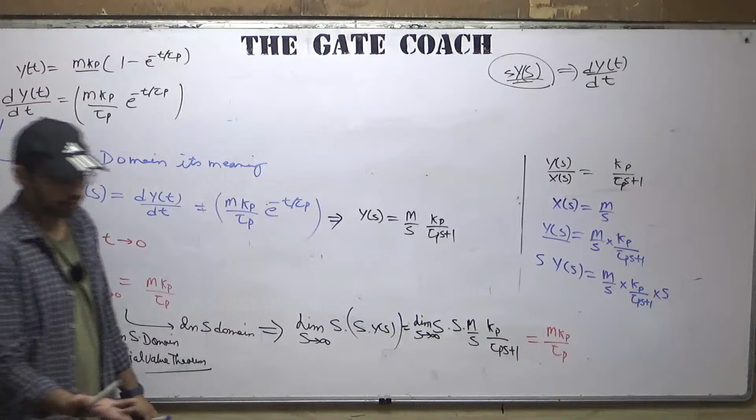Online students, any doubt till now?

Okay, you missed the first part. Which first part, just tell me. In the S domain, s tends to infinity — if we take this as s domain, s tends to infinity. Yes, that's right. This means that we are calculating the initial slope of a curve. The actual meaning of this thing is that we are calculating the initial slope.

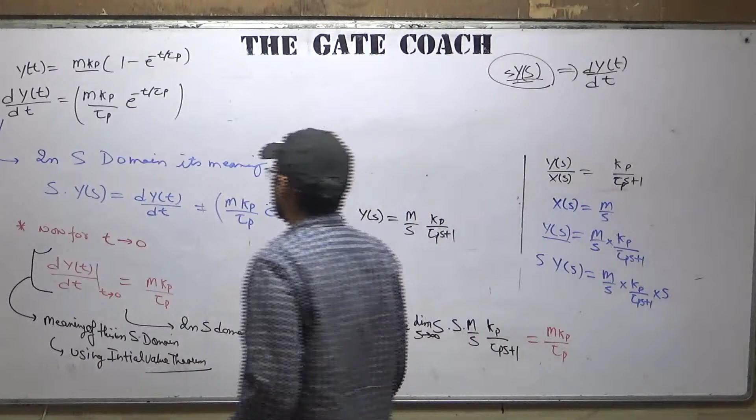Okay, basically I tried to explain the meaning of the previous lecture that we discussed: if I travel with the initial speed, it will take T equals tau p time to reach the ultimate value of response. And we have solved this with the help of different equations in the T domain. So how can we calculate the same results using the S domain?

So this is the way to calculate the value of T equals tau p using the S domain. We had solved it in the T domain, now we have solved it in the S domain. That's the thing you should know.

Okay, how are you able to solve these things when you are given only ys? If an equation is given in the S domain, you can also easily solve this if you know the tricks and proper use of the final value theorem and initial value theorem.

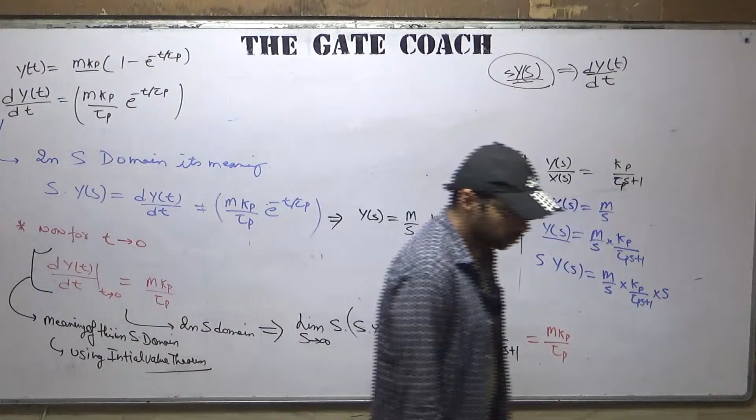Online students, got the point? Okay.

So please remember these things, they can ask you in the form of multiple choice or MSQ questions. They will give you a statement and can form it in any way. I will give you a test, and that test will contain these things. Don't worry, I won't give an easy test, I'll give a difficult one.

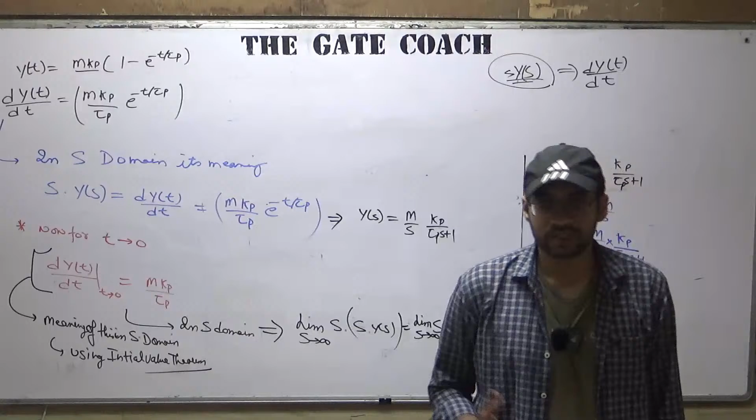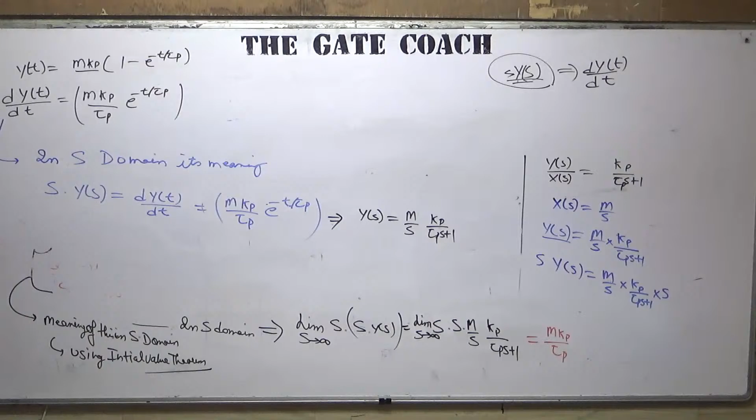Done with this thing? Okay, now we are going to discuss — we have discussed what first order systems are. You'll ask, sir, how can we feel what a first order system is? So today we are going to discuss the interpretation of first order systems in the real world, how a first order system looks in the real world, and how to make the equations using mass balance and energy balance — how you can model the first order system happening in the real world.

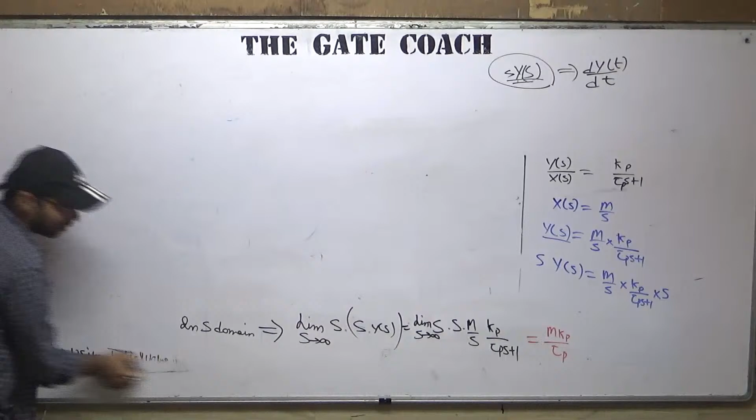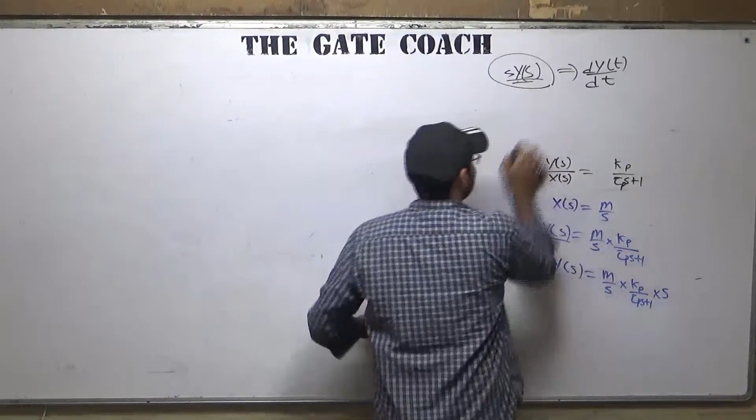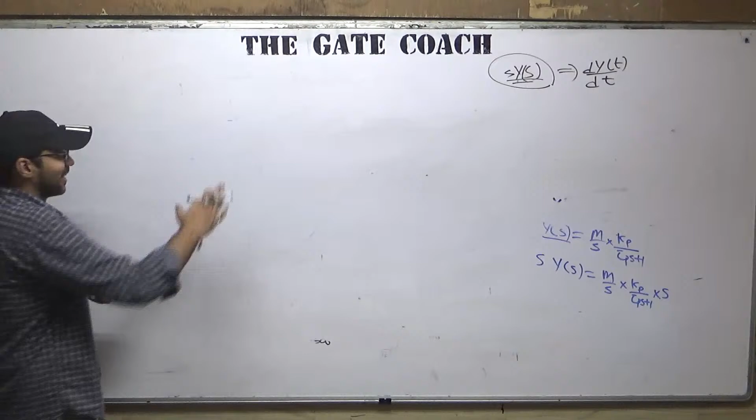अंसारी साहब कितना आता है आपको मास बैलेंस और एनर्जी बैलेंस, और नेताजी आपको भी देखते हैं कितना आता है. देखो नेताजी तो सो रहे हैं. सो गए क्या? फिर कहाँ खो गए? किस चिंता में हो हमें बताओ. किसी ने कुछ बोल दिया, किसी का मैसेज आ गया? आते ही नहीं सर, आने चाहिए इसका मतलब. अंदर ही अंदर तो लड्डू फूट रहे. हाँ सर आने चाहिए, क्यों नहीं आए? तो मेरे दोस्त कह सकते हैं तो, है ना. वो खुश हो रहे, मैं भी खुश रहना चाहता हूँ.

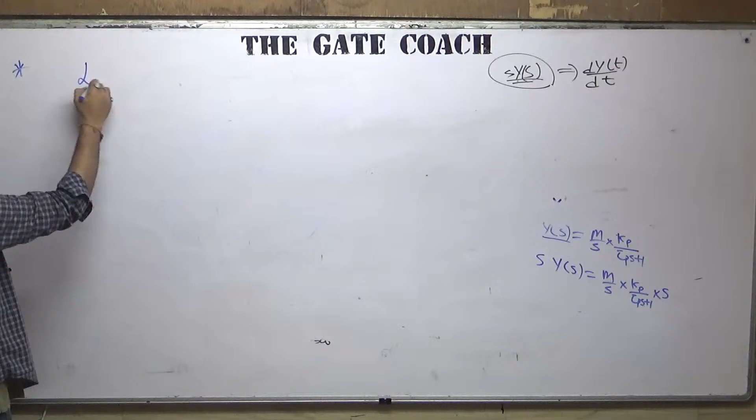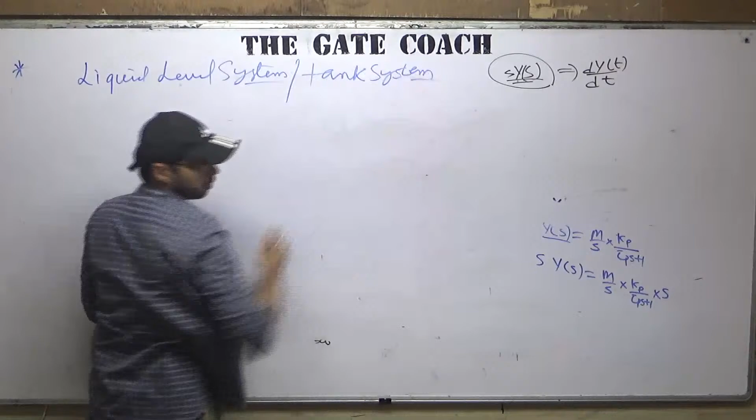Let's see what happens and how we can model this system as the first order system.

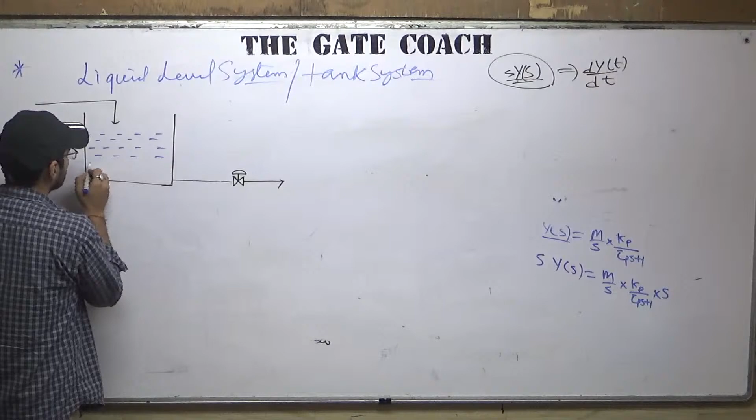This is your flow rate, Q in and Q out, right? Now, let's take this height as H.

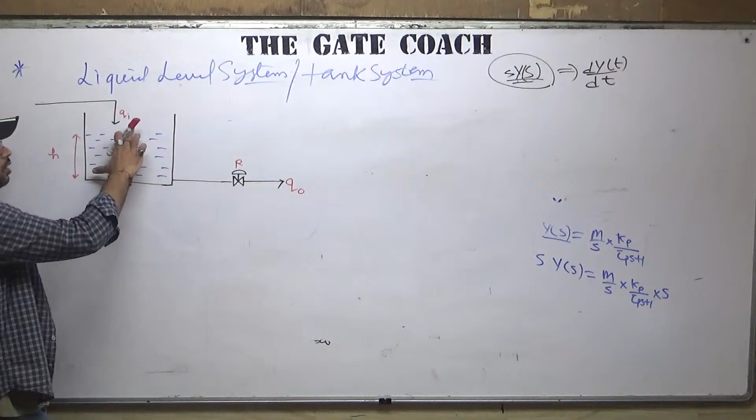So what is happening at initial steady state? Q is coming in. When water comes in, the height will increase, right? And after height increases, hydrostatic pressure will exert. Due to this, flow rate is also there, outward flow rate is there. It is Q naught. The valve is also there, and this valve applies some resistance to the flow, right?

Now after some time, this QI changes to QI dash, some disturbance occurs. So let's take this QI as first 5 meter cube per second.

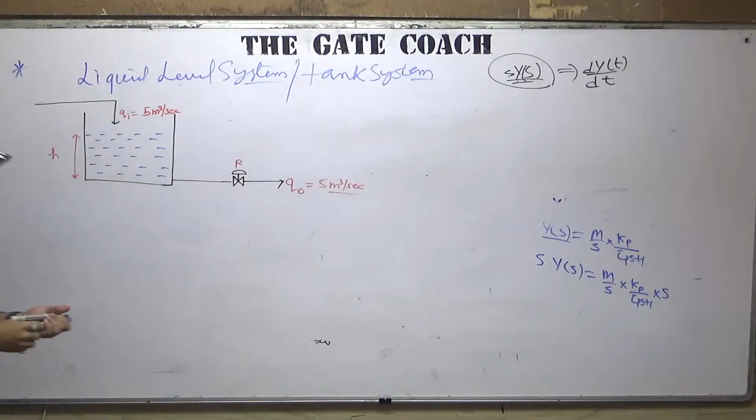So at steady state, when this is 5 meter cube per second, this will be what? This is clear, okay, 5 meter cube per second. Now, due to some disturbance in the backward, this flow rate changes from 5 to 10 meter cube per second.

So when it changes from 5 to 10, what will happen? The height will increase from HS to H, some height we don't know, random height, because height is a variable.

Now when height increases, what will happen? Hydrostatic pressure will increase. So what happens when hydrostatic pressure increases? Yes, Q naught also increases, we don't know exactly how much, but yes, Q naught will also increase. So it will change to Q naught dash.

We want some relation that relates the change in the output with respect to the change in the input. So for that, in this system, what do we have? Mass is there, flow rate is there, so we will apply mass balance.

We'll apply mass balance. So what will happen? Mass flow rate in minus mass flow rate out is equals to accumulation, right? In minus out equals accumulation. This is mass balance, simple to simple.

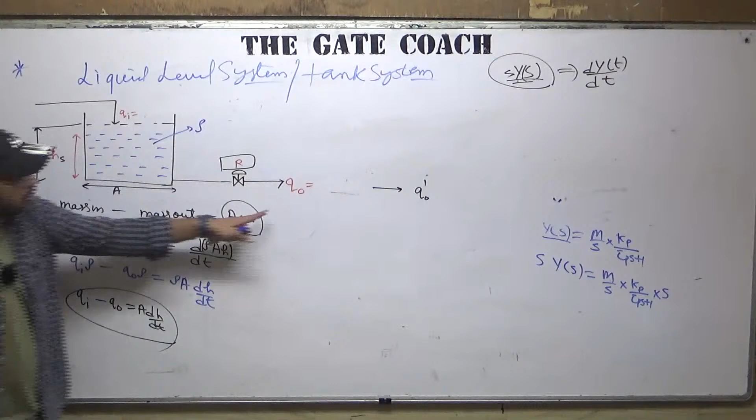Because R is also affecting Q naught. This is a valve, I can increase and decrease the resistance. R variable is also there, and we need to include R in our system because it is also affecting Q naught. But how it is affecting, we don't know. So we want a relation that relates Q naught and R, because Q naught is directly affected by R in some relating way.

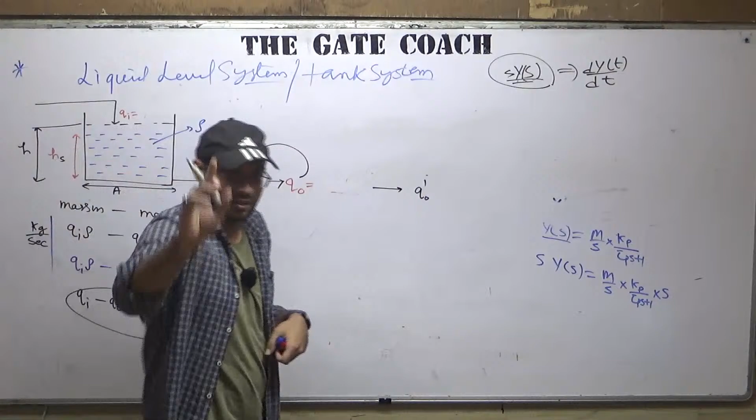So we want a relation between Q naught and R. But we know in fluid mechanics a small relation already. What is that relation? We will see.

The relation is that this tank system is there. If you put a hole here, and h height is there, what is the velocity?

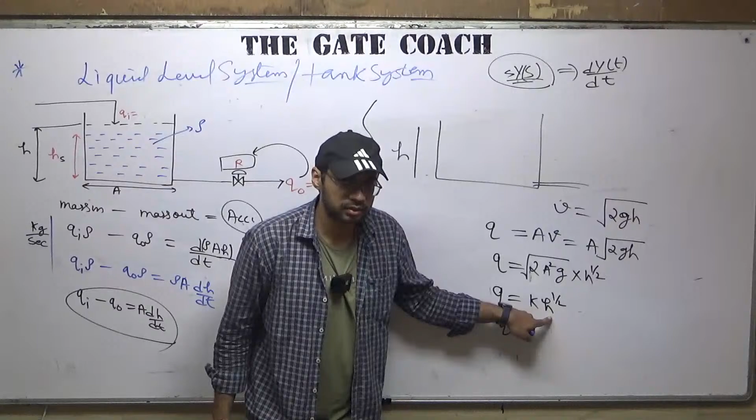Q, because see, this is the major thing, this is the height. Height is a driving force for the flow rate. What is another thing that affects the flow rate? Resistance. Resistance is another thing. This is the constant.

And R is what? 1 by K. And R is your resistance.

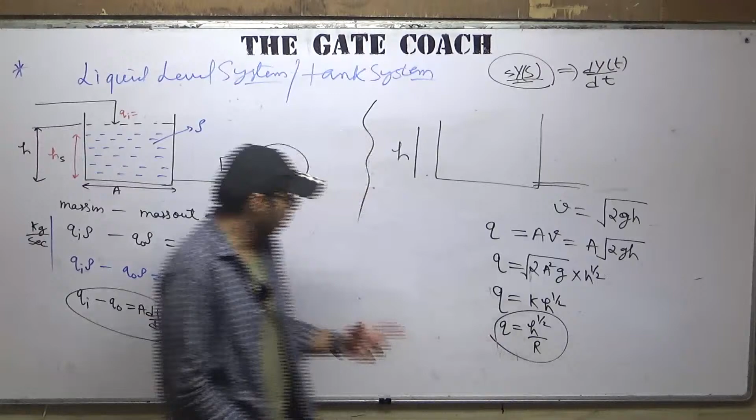Mera mann kar gaya. See, I am building up an equation, a relation for Q naught and R, because this Q naught is affected by the R resistance. How it will be affecting, we're going to discuss, right?

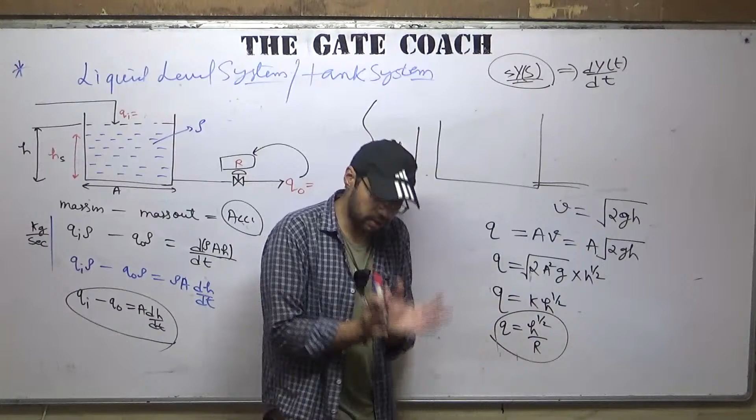Now what is happening here? This is a constant, but this is not actually a constant, it's a resistance. For this flow rate, this is the height. If the system is ideal, nothing is there, resistance is not there, this will not be there, but resistance is there, meaning this flow rate is not the actual flow rate, or you can say this flow rate is not the ideal flow rate. Some resistance is there in the valve, and the resistance is given by this thing.

But there's a catch, and what's the catch? This is not for the standard thing, this is for a special case. For this one, we want a standardization, we want a standard case. So what is the standard case for that one?

Yes or no? This is a standard case in the real world, not the ideal world. Okay, let's suppose when resistance is constant, right? And what is the meaning of resistance is constant? Nah, that is not the thing. If I am saying resistance is constant, what is the meaning of that thing?

Area to pehle bhi constant tha, jab to k constant likha tha humne. What is the meaning of that thing? If I am saying resistance is constant, okay, aur kya keh sakte hain in terms of fluid mechanics? What I can say in terms of fluid mechanics?

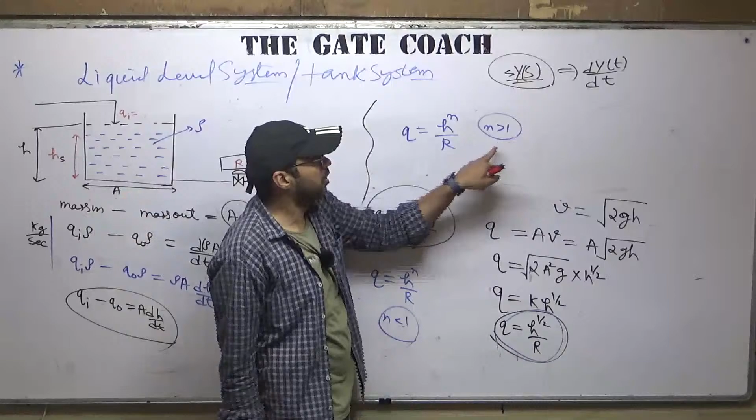But when the value of n is greater than 1, you will see later on in the fluid mechanics, when the value of n is greater than 1, okay, we are providing some external force, that is pump, right?

Now, we want some ideal case. We want some standard case. So for that, I am saying we took some assumptions. 3 to 4 assumptions are there. First assumption is that your density is constant.

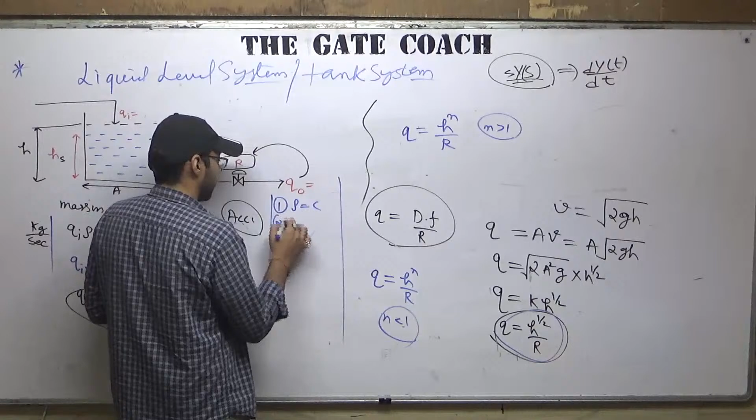It's the first assumption. Second assumption is that, first, density constant. Second assumption is your resistance is constant. Third one, no losses is there. No losses is there in the pipe. Free from any losses.

Fourth one, this Q is linearly dependent on H. This Q is linearly dependent upon H. We took some assumption. So when I am saying linearly dependent, no losses is there, resistance is constant, that means this equation is converted into what?

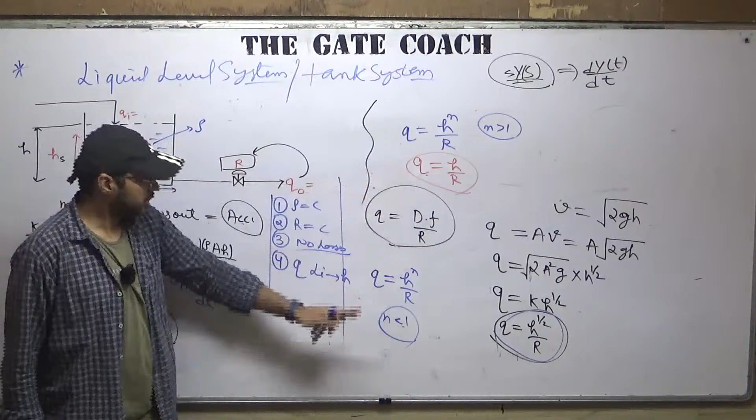Q is equals to H by R. Right? Got the point? So we took some assumptions. मैंने क्या कहा, जो Q है मेरा वो linearly dependent है H पे, कोई losses नहीं है, there are no losses in the pipe, and I am saying resistance is constant, and I am saying density is constant, right? So this equation will changes into, or this equation is changing into this equation, okay?

Or I can say more appropriately, I can also say that when the value of n is less than equals to 1, can I say the flow is there without any external support? We can also say, na, flow is there without any external support. This is the real case, and this is the ideal case. Can I say this thing?

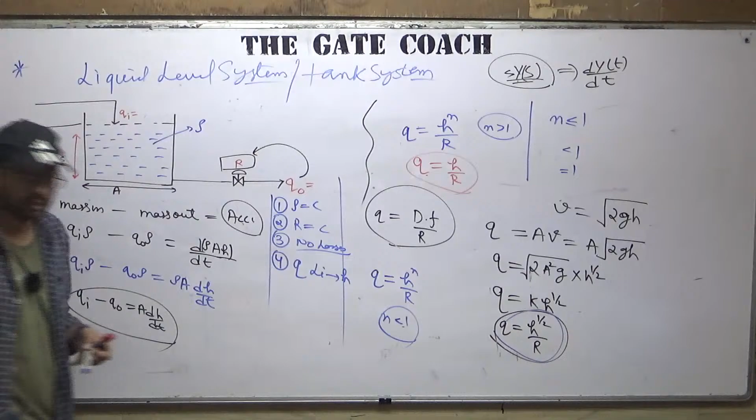बोल सकते हैं कि नहीं बोल सकते, बताओ? बोल सकते हैं? ओके, देखते हैं आगे बोल सकते कि नहीं बोल सकते, देखेंगे, राइट? बट अभी के लिए this is the case, right?

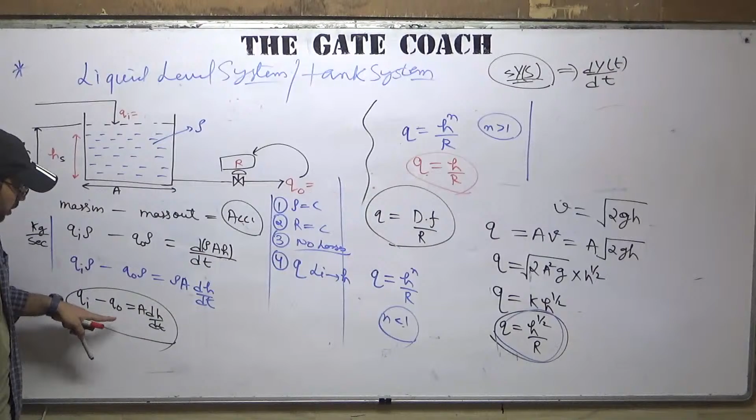Now I got this thing. Now I can apply here also in this equation, because we get a relation ना within Q naught and R, right? Okay, apply करते हैं, देखते हैं क्या आता है. We will see.

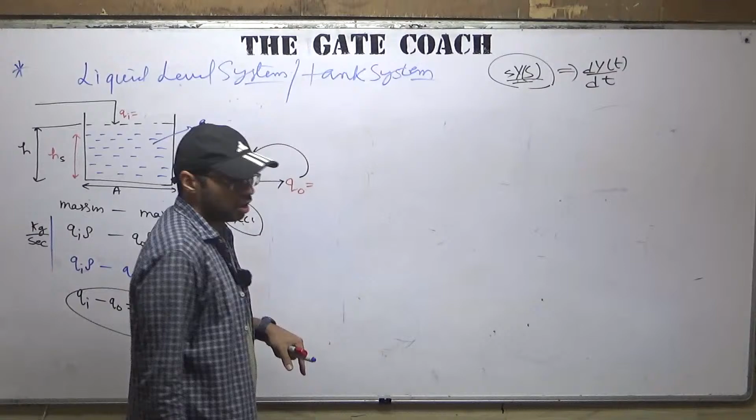So basically, our resistance is ideal. There are no losses in the pipe, right? And my Q is linearly dependent upon height, that is H, right?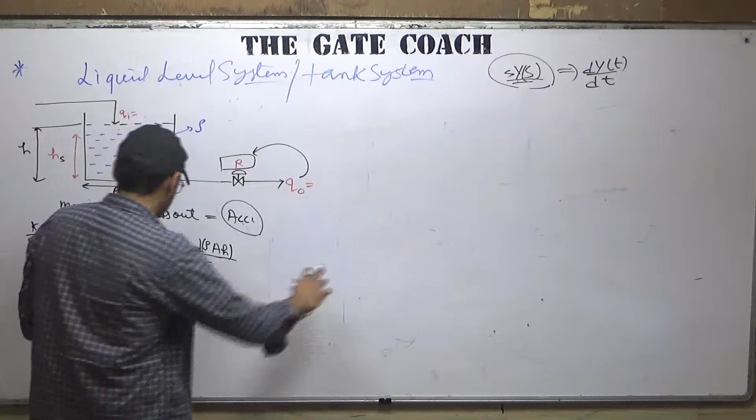So we can say from here that Q naught is equals to H by R. Q naught is equals to H by R. Now, this is a basic equation. Here Q naught, Qi is varying with respect to T, and H is also varying. We have to cancel out the initial value because we don't know the initial value of Qi and Q naught.

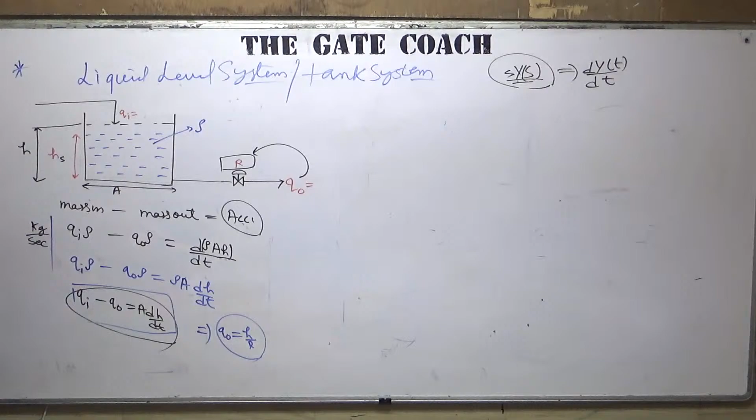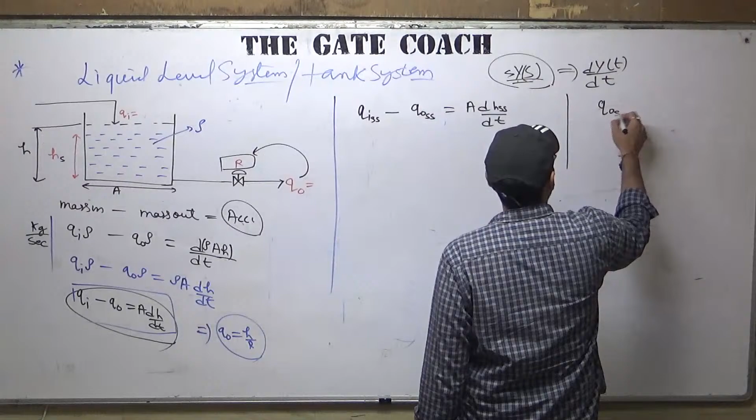Now for that, can I take at steady state this equation? So by taking the steady state, what you will get? QISS minus Q naught SS is equals to A DHSS divided by DT. Yes or no? Okay, similar to this one, can I also take this as Q naught SS is equals to HSS divided by R? Yes or no? Subtract this equation with this equation. What you will get?

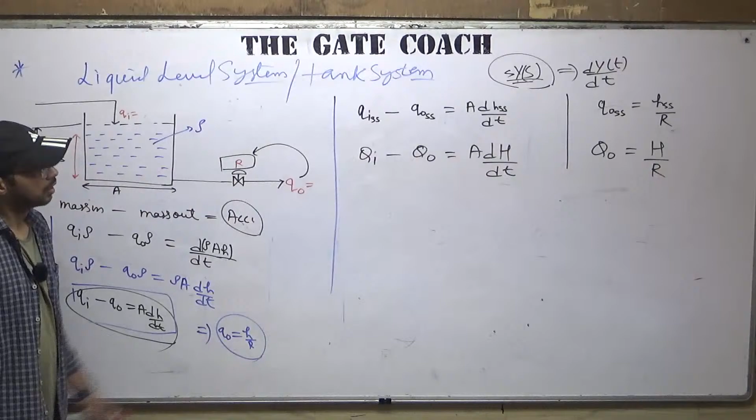QI minus Q naught is equals to A D H by dt. Q naught is equals to H by R. Yes or no? Apply the Laplace here and here. What you will get? Okay, before applying Laplace, replace Q naught with Qi minus H by R, A dH by dt. Now apply the Laplace, what you will get?

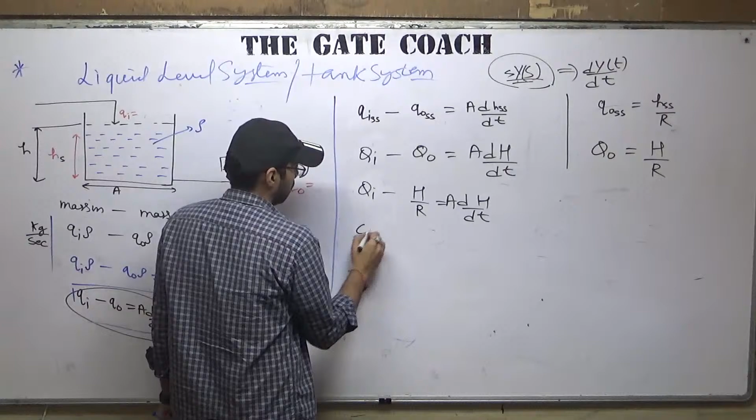Qi s minus Hs by R is equals to A into S into Hs. Yes or no? Multiply R on both the sides. What you will get? Qi S into R is equals to AR into S into HS, plus HS. Take HS common. What you will get? HS into AR into S plus 1 is equals to R QI S.

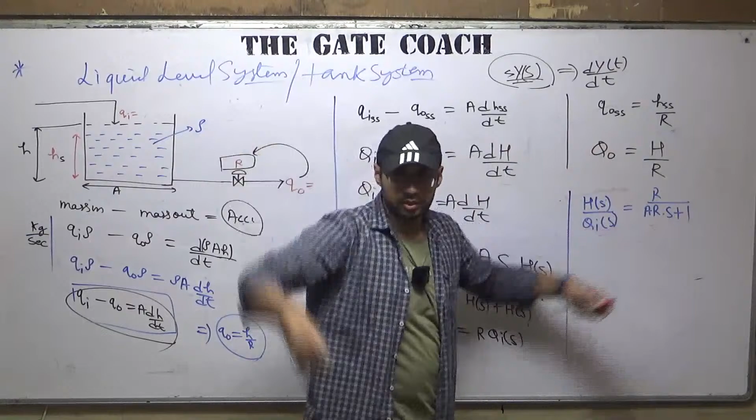Now, when I see this equation, this equation looks like first order system equation that we have explained, right? What is the first order system equation? GS is equals to KP by tau PS plus 1.

Now, if I compare this equation with this one, I can say Kp is equals to R and tau P is equals to AR. Yes or no? So from here, I can also say that HS divided by QIS is equals to Kp by tau PS plus 1.

So we have modeled our tank system or liquid level system to the first order system with the help of mass balance and Laplace transformation, right? And some basic assumptions. Done with this thing? Everything is clear?

Now, first of all, write down this topic, okay? Then draw this diagram first. Write this much down first.

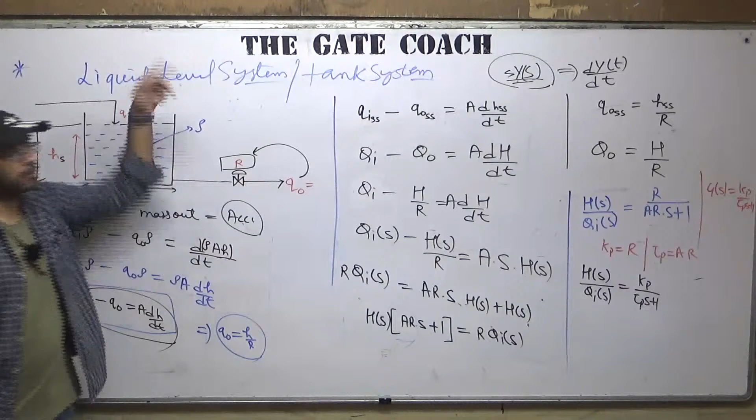What if you increase the inlet flow rate without changing the resistance? The height increases and there is a problem of overflowing. That's a different case, a case of purely capacitive system. We are going to discuss that also. But that's the second case of the tank series system. That's the case when a constant displacement pump is provided. When you provide a constant displacement pump, it will overflow. That's a different case, a case of purely capacitive system.

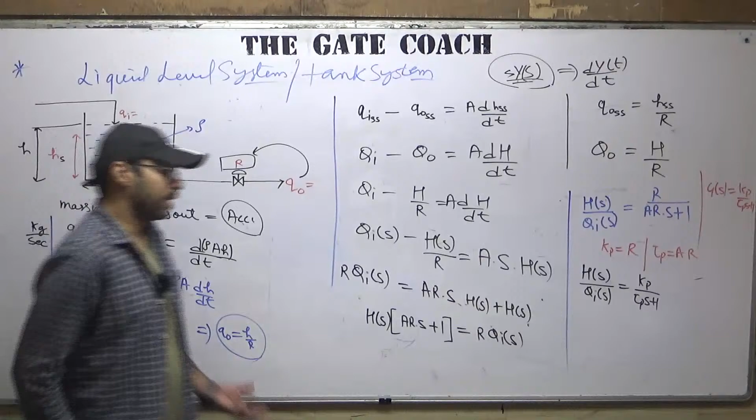When lumping is not there, we can call it as distributed parameter model. So what is lumping? Because you have studied this lumping of parameter in your heat transfer.

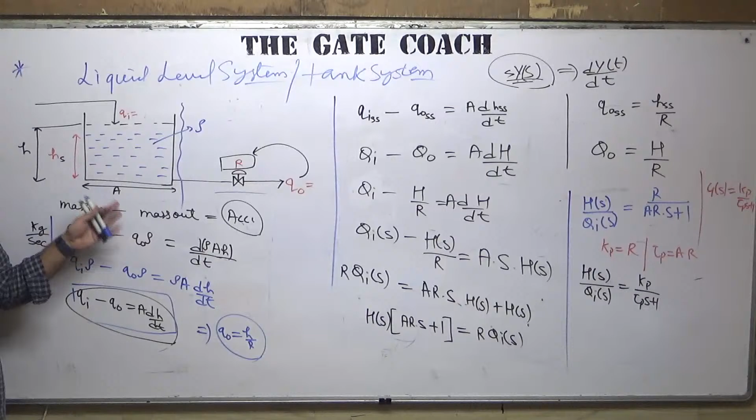The first purpose is that after this disturbance, a new steady state will be achieved. But in the industry, I want to keep my steady state at the old steady state. So for that, I need some controller that will control the resistance of the valve in such a way that this Q naught will increase. And when Q naught is increased, H will decrease and it will reach the initial steady state. That's why we are studying these things, in order to maintain the original steady state.

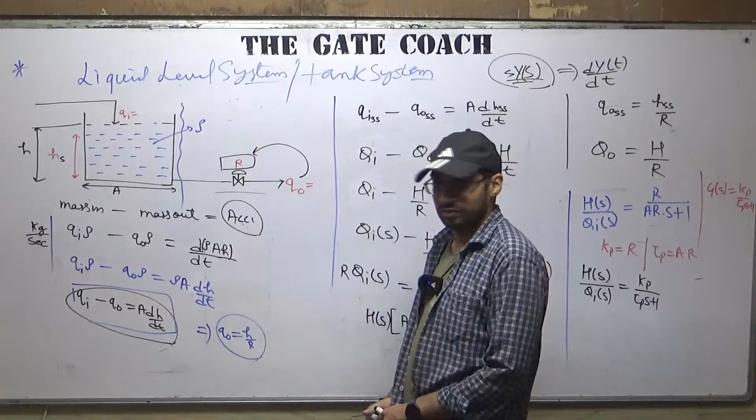Because after the intervention, after the disturbance, I will achieve a steady state, but that's a new steady state. But if I want the old steady state back, what will happen? I need some human intervention or external intervention to maintain the initial steady state. If you rotate the valve, then Q naught, suppose Q naught earlier was 5, and Qi is also 5, and then let's say 5 is increased to 10, new steady state, and then you increase R.

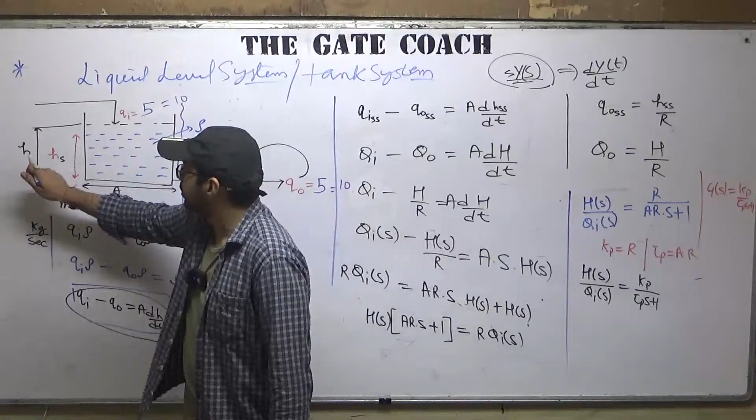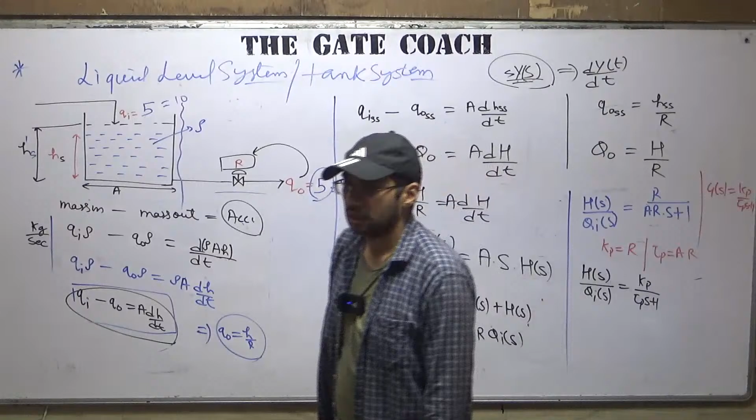No, I'm not increasing the R right now. I am saying after some time it will reach this one, and this will reach the new steady state, right? But I don't want to keep this steady state. So at that time I will open the valve in such a way that this will increase, but it will remain constant, and it will reach this HS, and then again I close the valve to the 5 flow rate. But Qi will remain at 10, right? Qi will remain at 10. Yes. Then that is not the old steady state. Yes, that's why I need some controller.

Before this, some controller is also there that will regulate the flow rate also, the inlet flow rate. It's not that the controller will remain only here, it will be elsewhere too, we will study this further. Okay, that's the controller part, the control system part.

If you are regulating with a controller, we cannot say that it's a self-regulating system. No, because according to my need, according to my aim, the system will change. But here, what is happening? This particular system attains a steady state, yes, it's a new steady state, but it attains the steady state. Now, when such a condition occurs, we will say it's a self-regulatory system. It regulates itself, without any intervention, external intervention, that is human intervention or some specific intervention.

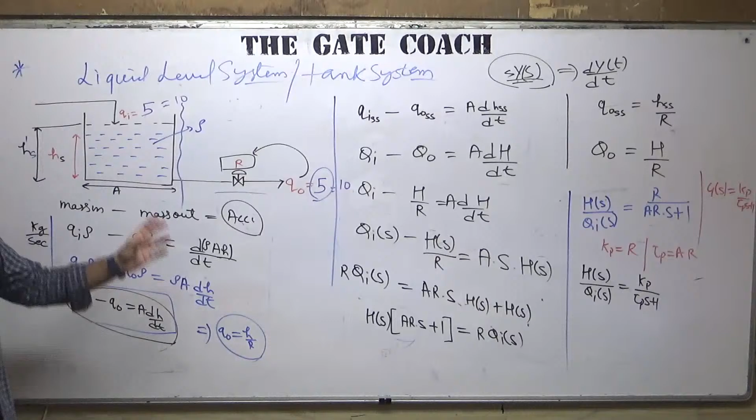They want to maintain the steady state because that is the issue, then we have to apply the controller. But the basic definition of a self-regulatory system is: without any human intervention, if it reaches or attains a steady state, we don't know which steady state, but if it attains a steady state, that means it's a self-regulatory system. It regulates itself.

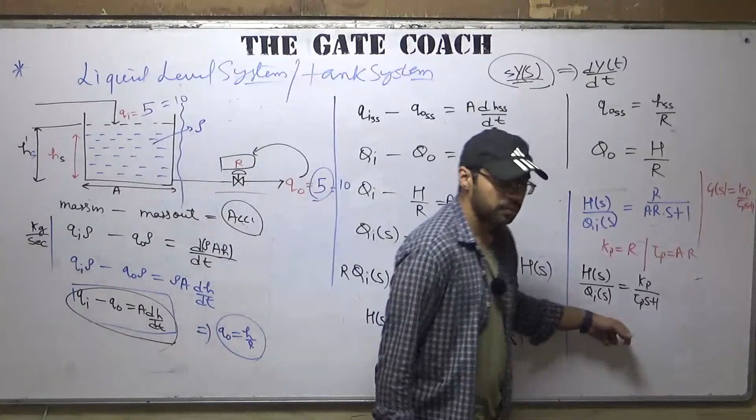Online students, if you are getting any doubt in this one, you can ask me right now.

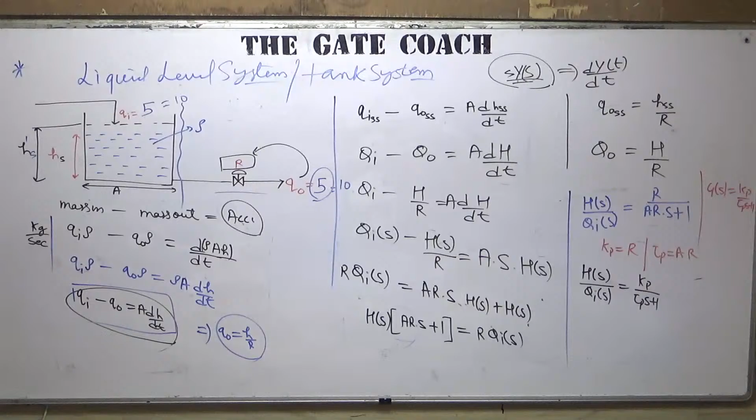Okay now if you are getting this thing, what is the value of this, what is the value of H of s? Let's suppose if a step input is there in the inlet flow rate, step input in inlet flow rate, it is M by s. Is this clear? Right? So what is the value of H of s? H of s equals M by s into Kp by tau p s plus 1, right? This is similar to the previous one, first order system with the step input.

So can I directly write this as h of t equals M Kp into 1 minus e power minus t by tau p? Yes or no? Right? Okay.

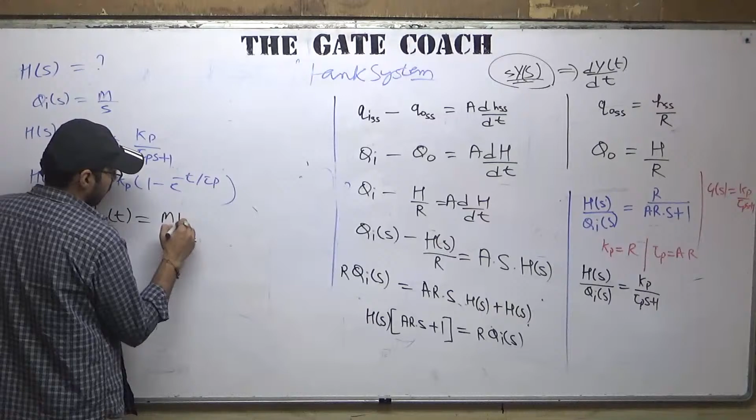So when they are asking about what is the change in the height, change in the liquid level, you need to calculate this one. When they are saying what is the final height that it will take, you need to calculate small h of t. Got the point?

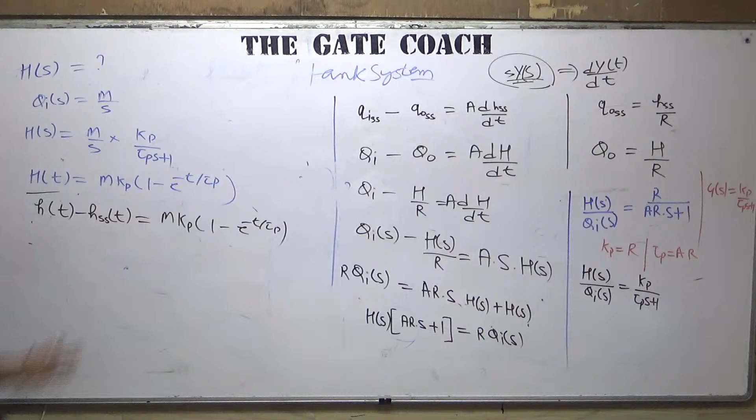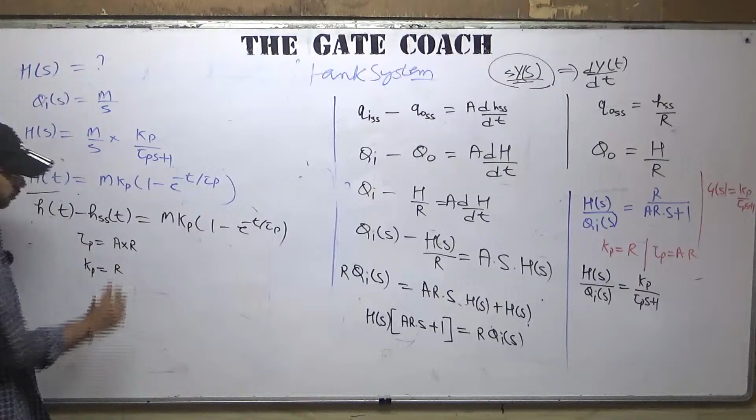Now here, what is the value of tau p? Area into resistance. What is the value of Kp? Only resistance. Write down this thing also. Got the point? Everything is clear?